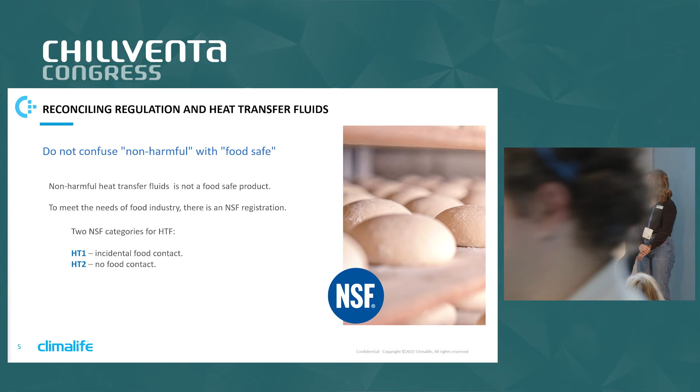On the other hand, a heat transfer fluid which is not NSF HT1 registered, but only NSF HT2, will make the product unfit for consumption, with all the consequences that entails. With this explained, let's look at how we can combine economy and efficiency with an indirect system. Firstly, why does an indirect system seem less interesting? Very simply, for design reasons.

If we look at a direct system, it's basically a compressor, an evaporator, and a condenser. If we look at an indirect system, it's a compressor, an exchanger between the refrigerant and the heat transfer fluid, a condenser, and also a pump to circulate the heat transfer fluid in the system. Therefore, more energy is needed to compensate for the losses during the heat transfer in the refrigerant to heat transfer fluid exchanger, and the power to the electric motor of the pump.

On average, 2% more consumption for each additional degree in evaporating temperature is used in an indirect application compared to a direct system. So to explain this a little further, if you have a system which needs a temperature of 0 degrees C, a direct expansion system would typically operate at -5 evaporating temperature. For an indirect system, the evaporating temperature of the refrigeration system will be lower. If you require 0 degrees, the outlet of the heat transfer fluid heat exchanger will need to be -5. The inlet will need to be -10.

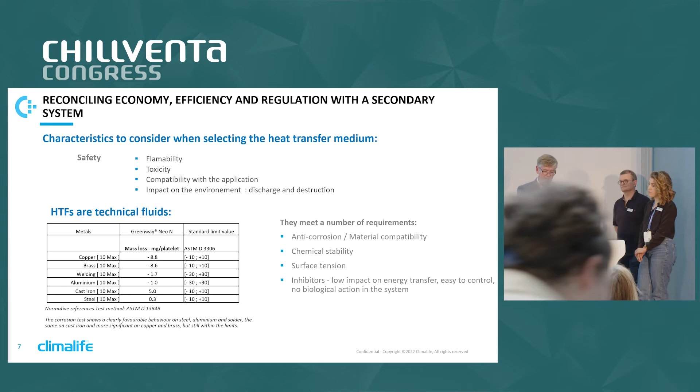From a technical point of view, they meet a number of requirements. Anti-corrosion, material compatibility is really important. Chemical stability, surface tension, inhibitors, really important again. They have an impact on energy transfer, make the system easier to control, and no biological action in the system. Protection of metals and low surface tension, good for wetting. These all help to improve the energy efficiency of the system. So what can we use? I'll hand over to Gaël now to go through the range.

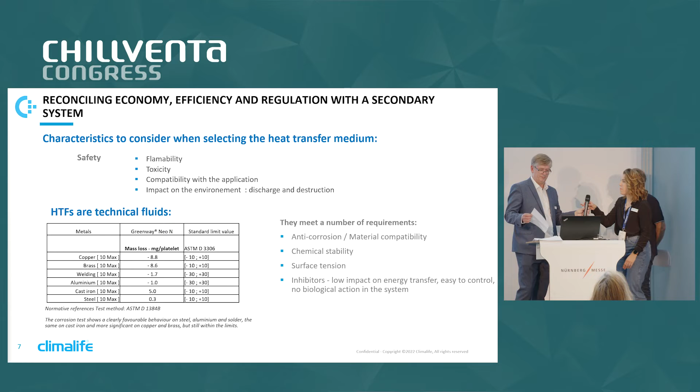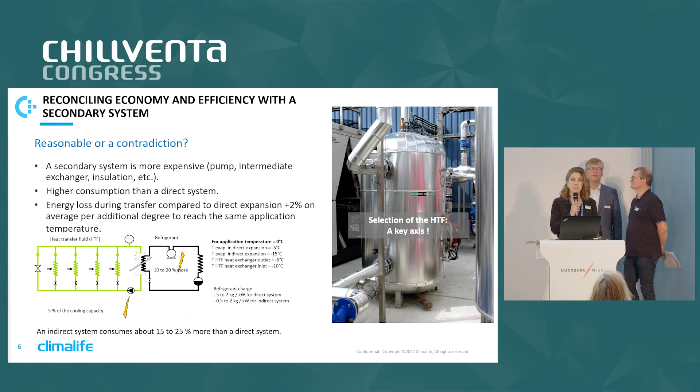So, as understood, selecting the proper secondary fluid or heat transfer fluid is actually major when you aim at energy efficiency. And if you look at the range, there are many bases available on the market. The ideal heat transfer fluid would actually be water. But as we know, water freezes at 0 degrees Celsius. It's not such a help. Then there are some saline solutions, such as Temper products, which are proved to be very efficient, but can lead to several damages in case of leakage due to high corrosion.

Then there are glycols, solutions that we have used for many, many years now, which are mostly, until now, from non-renewable petroleum sources. We have low-pressure organic fluids, such as R1233ZD, for example. And finally, we have a new generation of heat transfer fluids which are biosourced or bio-based, coming from vegetables, fully renewable, and which are the topic of today's presentation. So on this slide, you can see the operating ranges of those products.

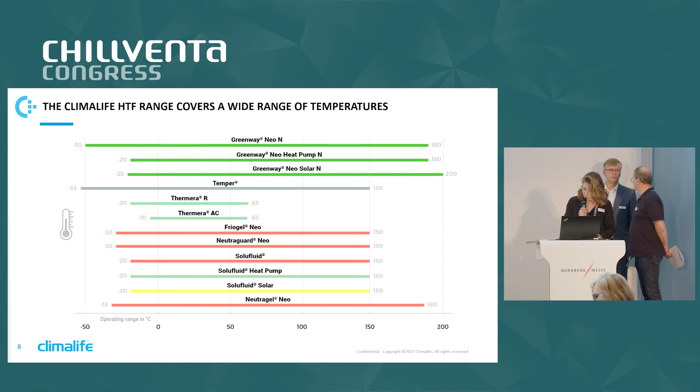So when we look more specifically at a biosourced product, what is it? Well, first we grow what needs to be grown. Some specialists have developed specific bacteria to create fermentation. Those bacteria are, of course, deactivated. Their only purpose is to transform the harvest to sugar, and then to the molecule we are looking for, in this case 1,3-propanediol. And after fermentation, there is the refining protocol, which leads to the compound that we are looking for.

So why are we looking at this? Of course, the environment is at the heart of our strategy. The idea is to have a lower environmental impact. And if we purely look at the life cycle analysis of the production of such molecules, you can see that the environmental footprint of the 1,3 biosourced product is reduced by 40% when you compare it to a traditional MPG. By traditional, I mean not biosourced, of course.

It is also 42% compared to a synthesis 1,3-propanediol, so compared to the same molecule, but which is a petrol-based one. So looking for a reduction of energy consumption and a lower environmental impact is obviously beneficial for us and for the planet and for the future.

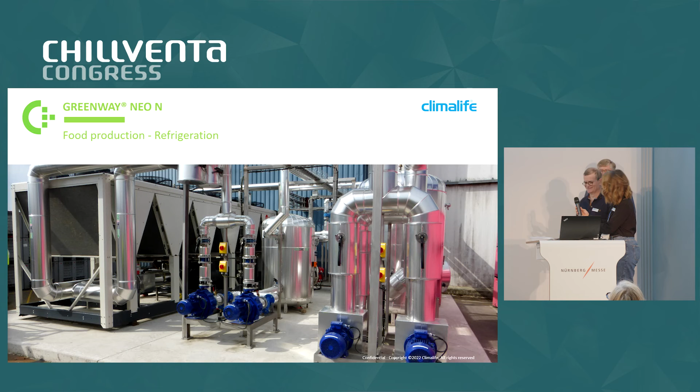Thank you, Gaël. So now we will speak about the characteristics of the product. As Neil said before, it is an NSF HT1 product, so it is really interesting for the agro-food industry. But that's not the only element in favor of Greenway NEO. We have also other things to see to compare different HTF. The first benefit of Greenway is its viscosity.

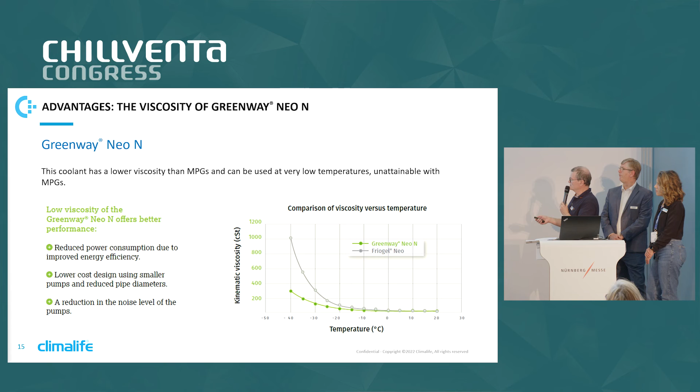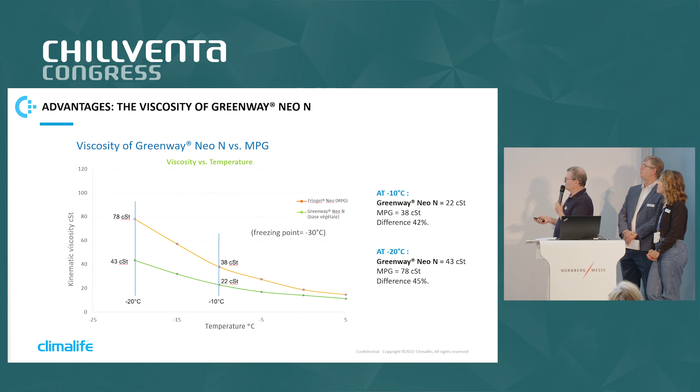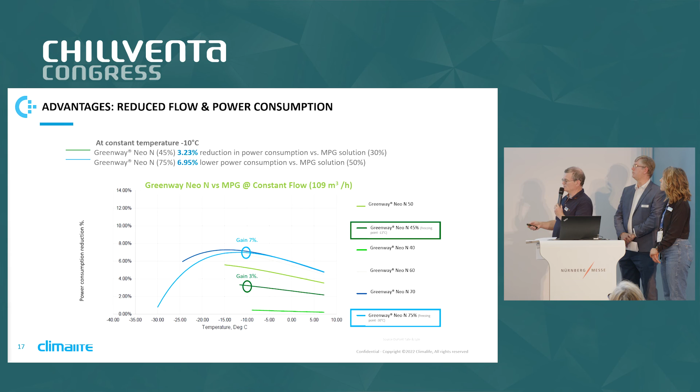If we look in the system, we compare two products at the same temperature protection. We compare the product at -13, so -10 temperature in the system. And if we work with Greenway NEO, we can win 3% or 7% regarding the constant flow against MPG solution. So for the same protection, we can gain 3 or 7% with the Greenway Neo base.

And if we change the flow of the pump, we can increase the gain from 3 to 8% and from 7 to 12% just by reducing the flow by 2%. So, as you can see, we can reduce consumption. We can have benefits with these products, and the production is better with the Greenway Neo than MPG base for the same cooling protection.

So I think that it's to you, Gaël, to finish. No, it's not me. Yes, it's you.